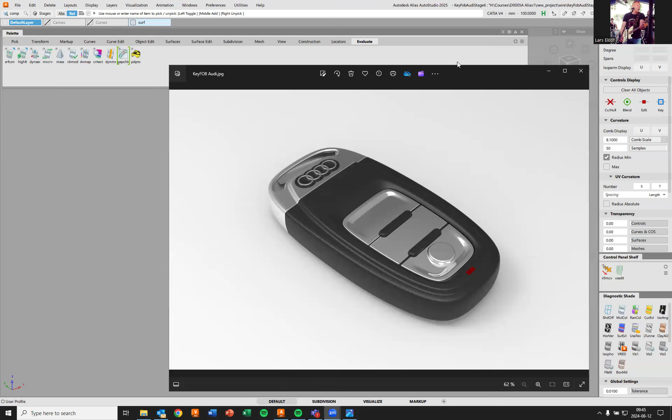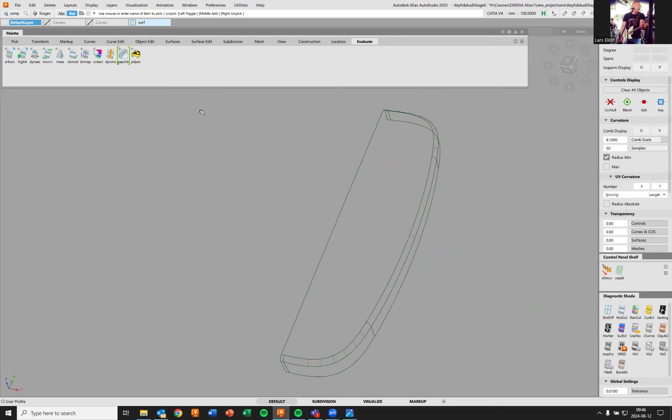We've come this far with the basic surfaces, the surfaces around it, and we've also worked with some surface fillets. In order to create this embossed surface, we need to have a look at the canvas. Let's put ourselves into a top view like so. So what we're looking for is to find this contour right here.

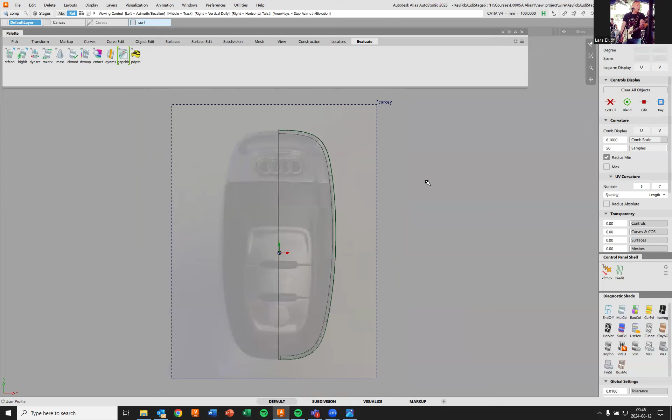To do that, we're going to bring up our old curves from the very beginning and see what we can do with them. So I'm going to turn on the curves layer right here and make it pick that one to begin with. It's curve number two. We've got two on top of each other there. So curve number two, like so.

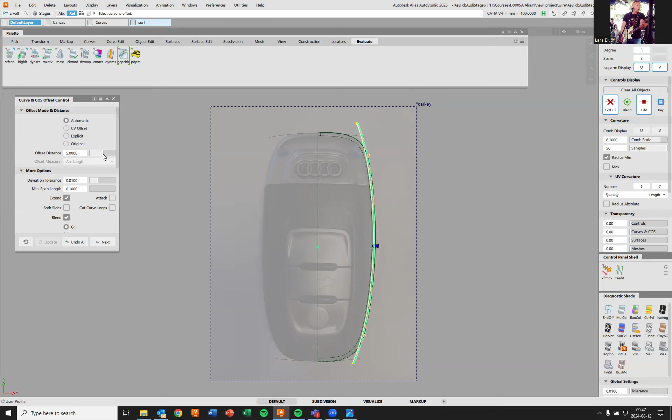We're going to bring up a tool, a really neat tool under curves called curve on surface offset, and bring up the options box as well there. Here we have a bunch of different options, we can flip the arrows, the direction of the offset, and also, of course, the distance. So I'm going to bring it, well, maybe here somewhere, 40 millimeters or so.

There are a number of options here, and you can play around with those and see what happens. I want to keep the same degree on this curve as I had on this one, which was a third degree curve, so I'm going to put CV offset. Then it copies the distribution of the CV points from the original curve. Now, an offset is basically a copy of a curve at a constant distance from the original. You can see that the distance between these two curves is constant throughout the curves, in this case, 40 millimeters,

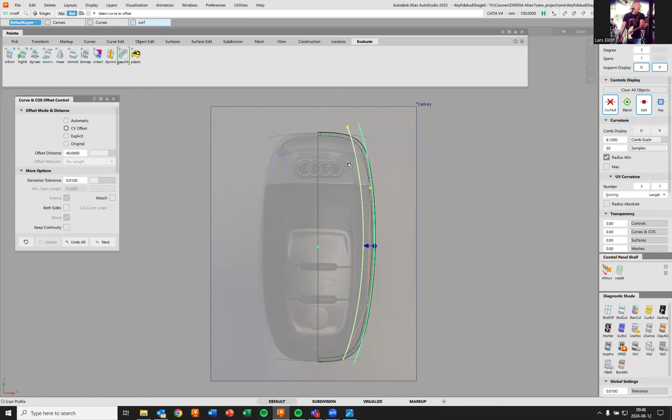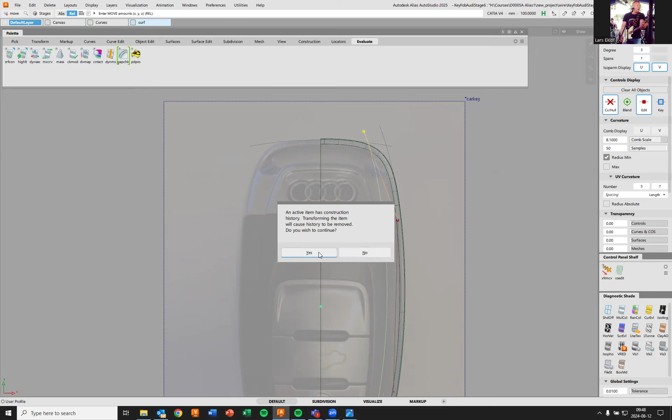or 4, since we're working in a scale 10 to 1. So let's keep this one and start tweaking it to better match our contour here. I'm going to go next, and then pick CV, and as usual, move my CVs around.

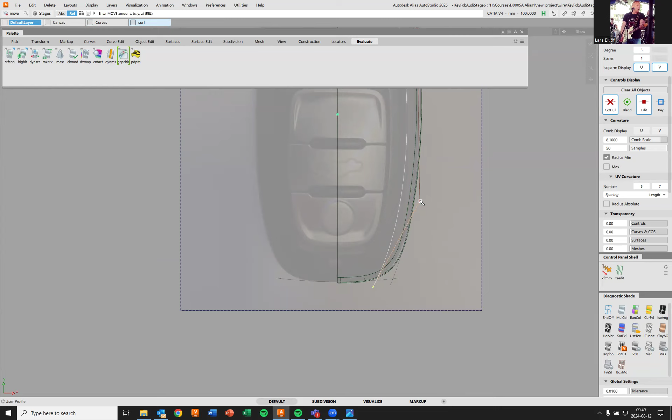And it has a construction history because of the offset, but we don't need to worry about that, so we do wish to continue. Then we can start moving our CV points around, something like that. Maybe this one needs probably to come out a bit. This one is kind of hard to see, but I think something like this will do the trick for us. I'm working with oversized curves, at least at this stage.

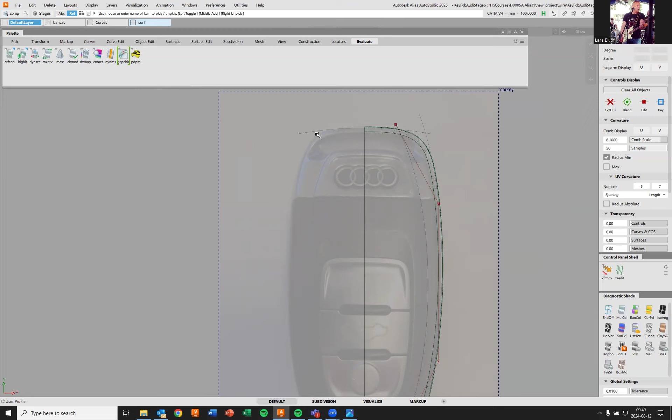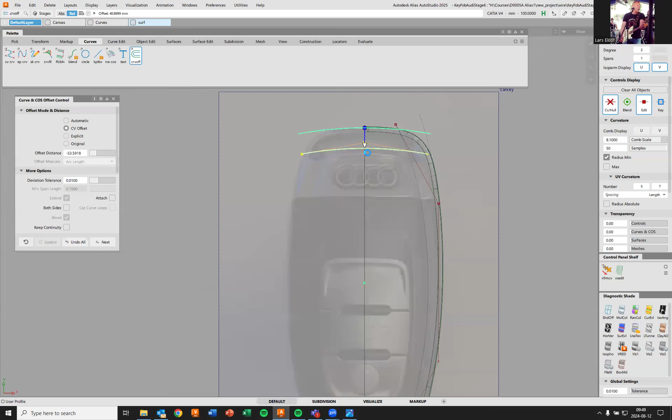Let's do the same with the top curve right there. So I'm going to pick that curve, go curves, and curve on surface offset, and flip that arrow. I'm sorry. Oh, I can bring it down here manually as well, to try and hit this edge right here, something like that.

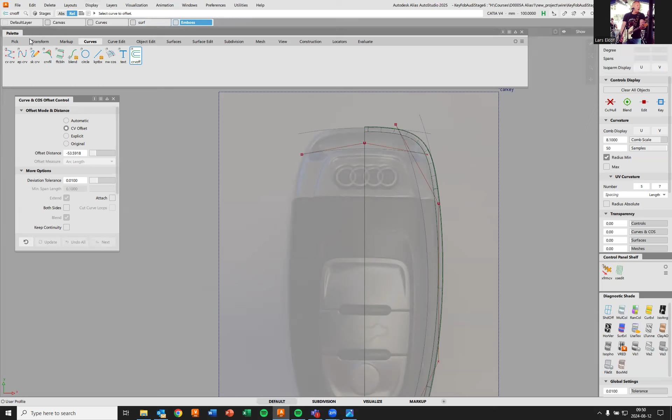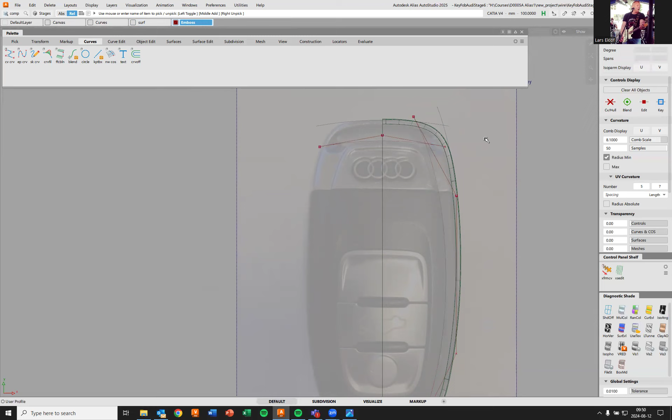This is a good time to create a new layer also, so I'm going to do that. Layer, new layer, and call it... what should I call it? Emboss, maybe. So this is our embossed layer, and put these new curves into that layer, so those two. I'm going to make this layer a different color as well, so I press and hold that little square and choose a dark red one, like so. Now we know that the red curves belong to our embossed surface.

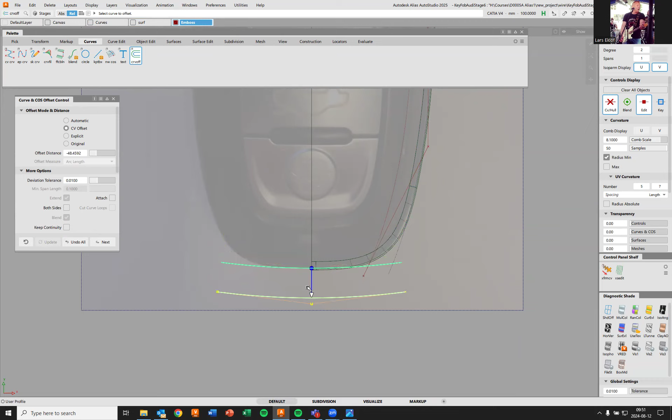We have one more to do down here. I'm going to pick that curve, curve number 4, curves, offset, like so, but make it go in this direction. It's kind of hard to see, but I don't want it to hit the radius here, so I'm going to bring it up way up here, something like that. Go next.

Next, we are going to do things a little different compared to the outer contour here. Remember, we made oversized surfaces here and then rounded them off with the surface fillet tool. This time we're going to try a different tool, which we find under curves as well, called curve fillet. So we can actually create a curve catching this contour right here. So let's do that.

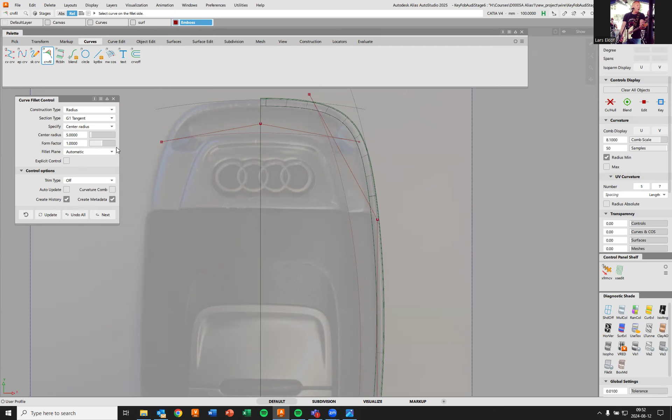Hit the first curve and then the second curve and auto update so we see what's happening. And we got a tiny little radius there, way too small. So I'm going to bring up the radius.

Let's see if we can emulate this shape. No, we have that set to G1 tangent. Remember from the surface fillet tool, we used G2 curvature to get a really smooth transition between the two. And this looks a lot more promising.

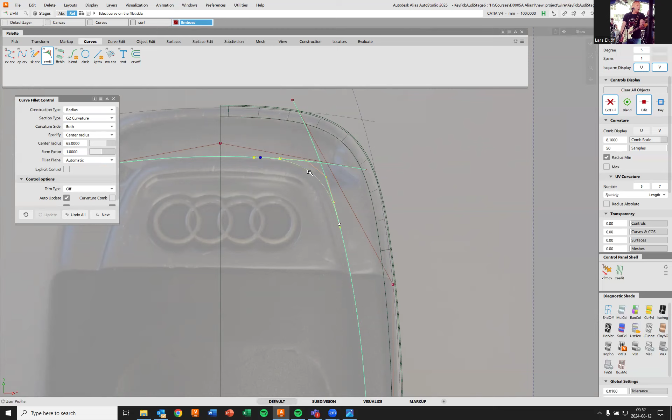If we bring down the radius slightly, something like that looks nice, doesn't it? Radius of 65 at the top here. Looks nice. So let's keep that and also turn on the trimming of the curves.

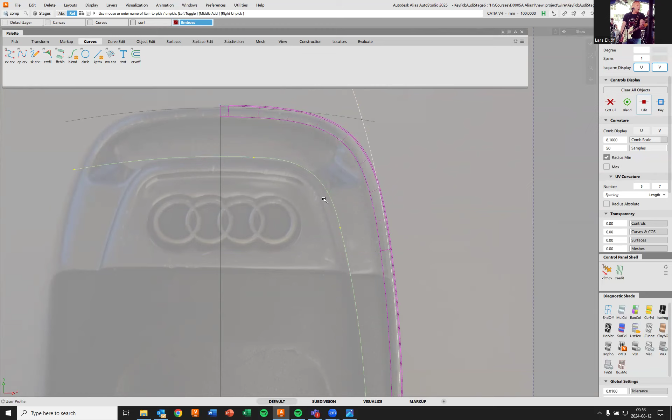And then we go next. We can also turn off the CV points for these to see what we got. And we got a fair replica of this contour right here. Good enough for our purposes anyway.

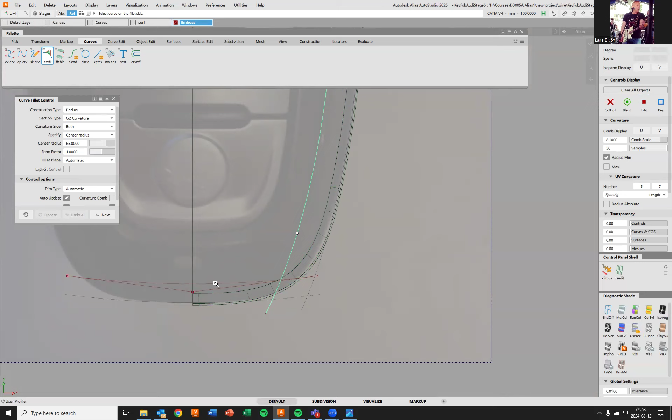So let's do the same thing down here. So we go to curves, curve fillet, G2 curvature, and gonna try and trim this one here and here. Gonna work. There we go. And maybe here, like so. That looks pretty nice.

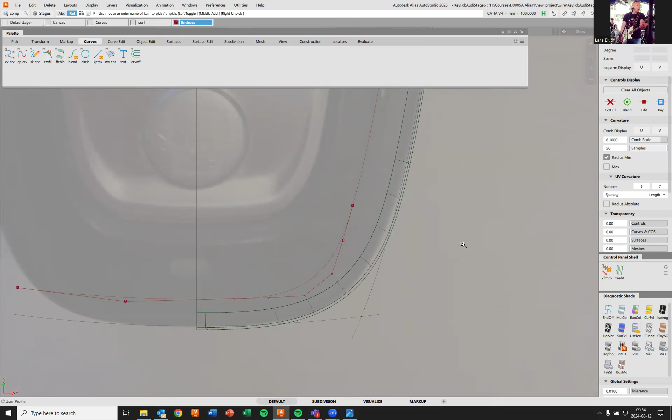So I want this distance between these two to constantly grow around this corner to end up with this distance right here. That's really what I'm looking for when I'm tweaking this curve. But I think that looked kind of okay. So let's keep that one and trim it, and we can also turn off the CVs for these curves.

So now we have an outline for our embossed surface. Only thing is that it's sticking out here, but we really don't need to worry about that at this point.

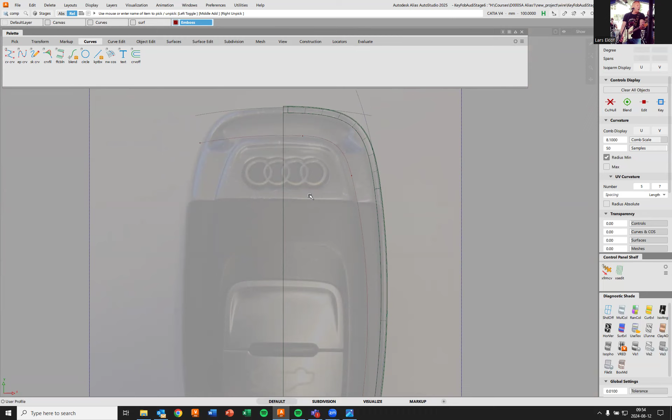So let's go out to the 3D view and create an offset surface. An offset surface works the same way as an offset curve. So any given point on the surface has a constant distance to its parent.

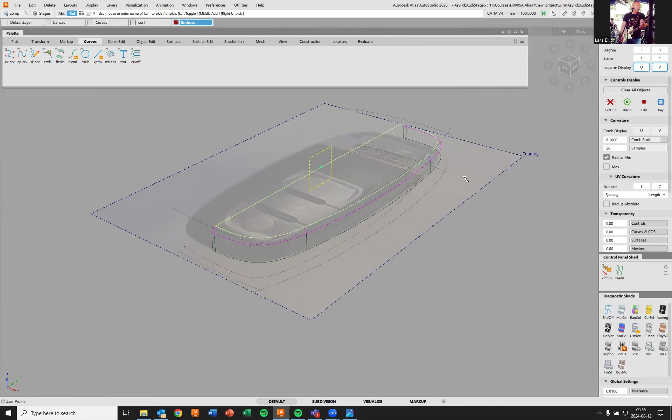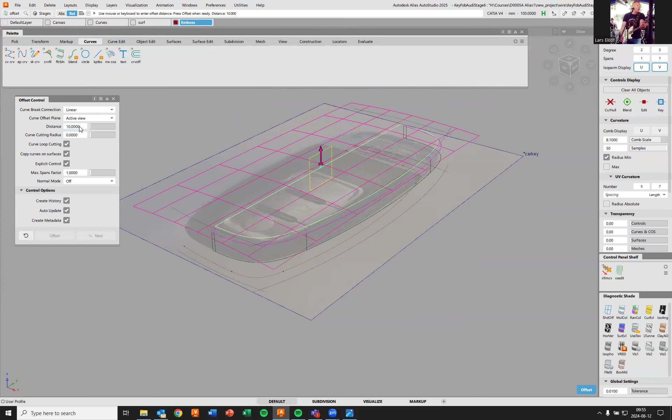So if I go to Object Edit and Offset, it's already set to 1 millimeter, we need to bring that up to probably 10, since we're working in a scale 10 to 1. Once I've done that, I click Offset and I get an offset copy of the original surface.

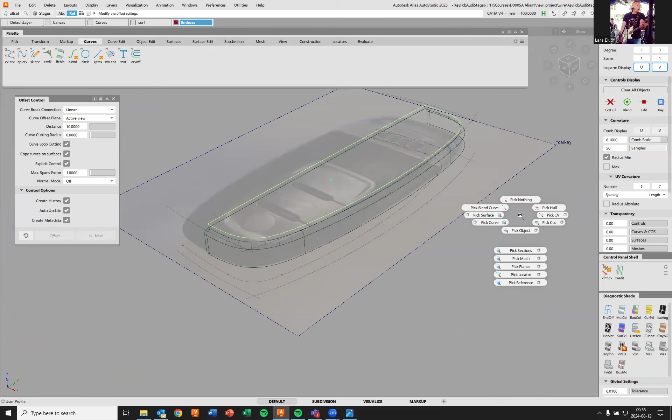Note that the trimming of this surface comes along as well. So I'm going to untrim it for now. So I go untrim and all.

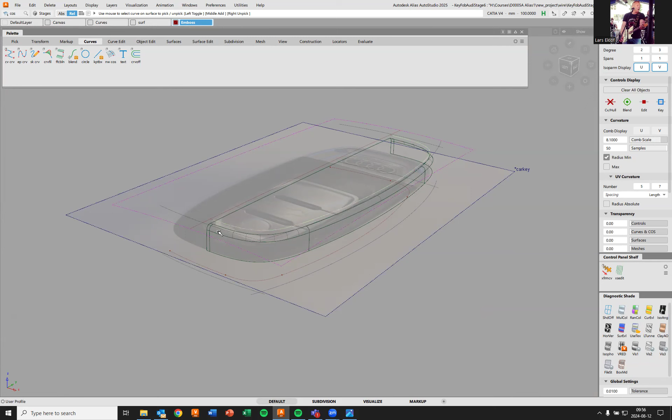There we go. Now an untrimmed surface like this one has all of the curves on surface used to trim it. So I'm going to get rid of these because I want to trim it with my new contour that I created down here. So pick nothing, pick curve on surface, and let's get that one, that one, that one, and I think there are two tiny little pieces there, and one up here as well. And we delete those. I want to keep this one along the symmetry line because I want to trim it along the symmetry line.

Next thing to do is to project our new contour that we created down here. Remember the red curves? I want to project those onto this offset surface. So I pick the surface, I go project, and now we need to be aware of the projection direction here, and we want to project it in the direction of Z right here, not the view, not X, not Y. So Z, which brings this curve straight up until it hits our offset surface here.

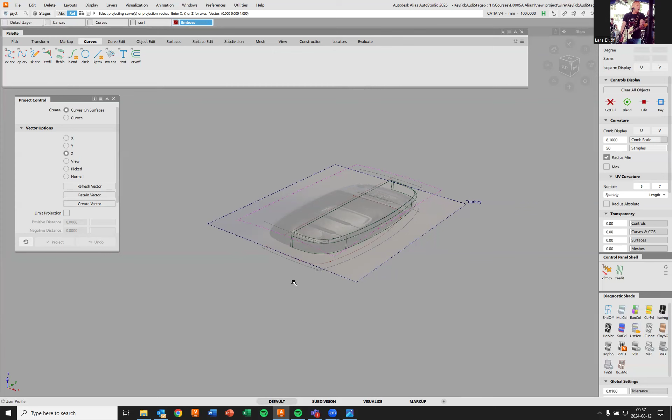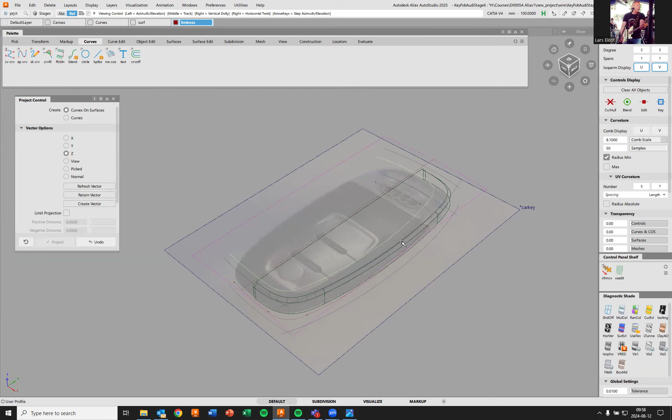And I can then start picking, or I can pick the surface. Oops, sorry, I did pick the surface. And then pick the curves right here. That one, that one, that one, that one, and also that one, and go project. Now I have curves on surface on my embossed surface right here.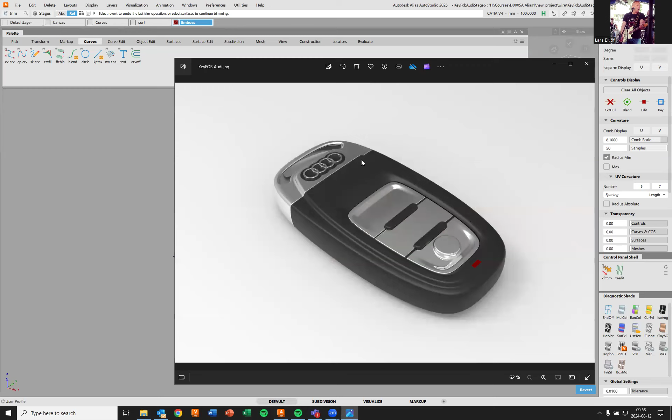So let's trim it. We go trim and select the area to keep, and there is our embossed surface. If I bring on the picture here, it's this surface right here, which we can work with later on.

Let's have a look at what this looks like really quickly and turn off the canvas as well. We can do it that way. You can clearly see we have an offset surface right there with this contour here.